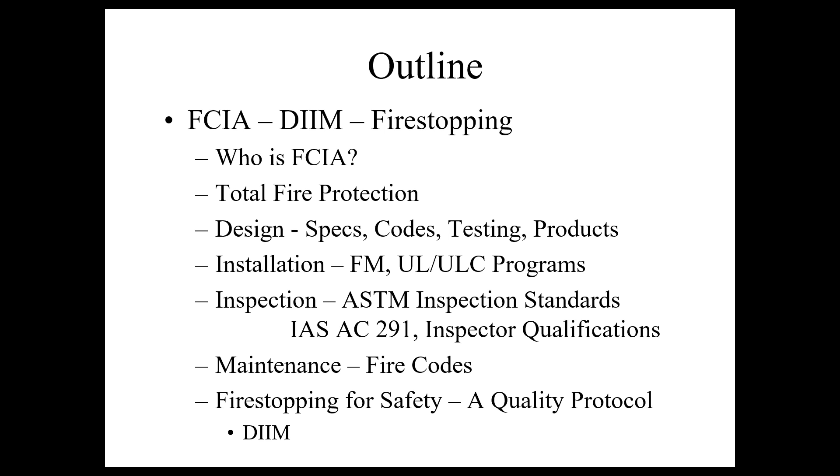So who's the FCIA is what we're going to cover, a little bit about total fire protection, design, specs, codes, testing, installation, inspection, maintenance, and fire stopping for safety. I'm going to vary the presentation just a little bit from time to time and talk about some of the things in the industry as well.

So the FCIA members include contractor company members, manufacturer company members, Firestop consulting agencies, distributors, and manufacturer reps. That's the membership, company membership, and anybody at the company can participate in things at the FCIA. We don't keep things hidden behind a members only section, we keep it wide open for people to see. There are some benefits to members that we do keep in the members only section, but not everything.

We try to keep the website open so that specifiers, building officials, fire marshals, and others can go learn about our industry at a very friendly site. Look for the website to be updated here shortly, launched in the next 30 days or less. What do we do as an association? We advocate for fire and life safety. We've got members that are involved in fire stopping and barrier management services.

This barrier management services trend started about 15 years ago at the FCIA in 2006, 2007. Our first barrier management symposium was at the 2005 Firestop Industry Conference and Trade Show in San Diego. We invited the door industry, the gypsum industry, the door hardware industry, the fire-rated glazing industry, and of course us in fire stopping. We talked about the whole barrier.

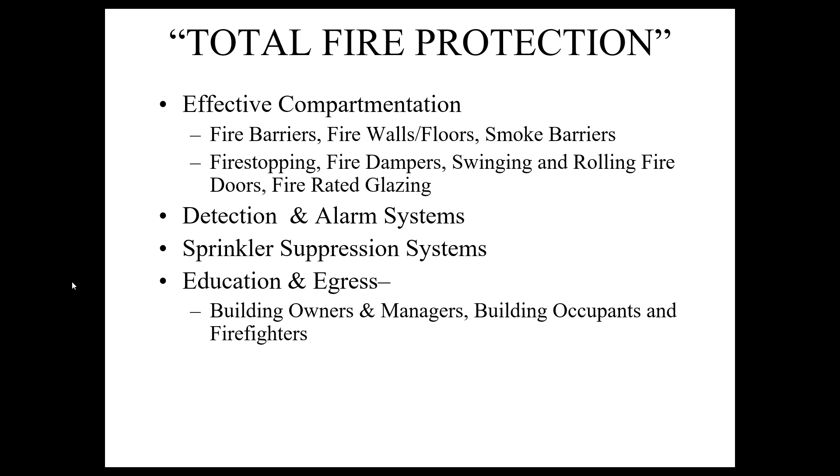Building owners and managers have to design, working with professionals, that egress system, and the building occupants and firefighters need to understand that egress system so they know there are two ways out of a building. We always used to joke with our kids that they ought to know two ways out of that college recreational place and the educational place. Now at age 30, they get it.

So the DIIM: proper design, a specification written by a professional, a single specification, the 078400 section. That's the overall section such that there's one offered.

One specification section. There are several choices in master format. CSI and CSC develop master format together. There are several sections that can be used for specifications, 5 different sections. The question we always ask our architect friends is, do you really want to have 5 different sections to talk about the same concept? Do you want to use that much paper, that much disk space in order to describe one specific operation called fire stopping?

Most of the major specifiers we know through Construction Specifications Canada, Construction Specifications Institute, use that simple 078400 single specification section to put perimeter fire containment, joints, both head of wall, bottom of wall, and then also penetrations, of course.

The tested and listed systems, I'm not going to go through the test standards, but just know there's all kinds of different test standards that determine the suitability for use of the Firestop systems in specific applications.

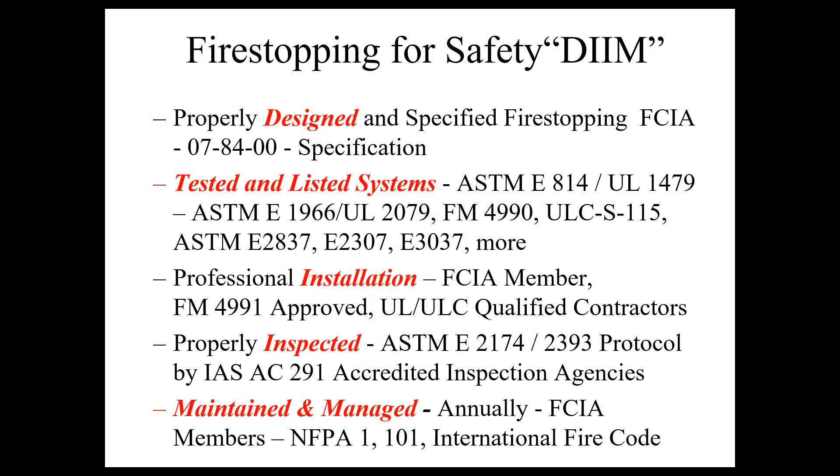Maintained and managed, that's a big thing. We're going to go through that in a little bit and talk about the specifics of maintenance, because existing buildings, we believe, is where there's an opportunity to make sure that the fire resistance is going to work when called upon by fire. Same thing with smoke resistant properties of buildings.

There's a lot of obligation in the fire codes to the building owner on that. We'll go into it later on.

Proper design, the code, the specifications, and the systems, or as they're called in the building code, design listings and manufacturer's installation instructions. So D, design, the building code communicates to the specifier, the architect, design professional, to specify the appropriate standards and the appropriate installation process for fire stopping. That comes through the specs directed by the building code.

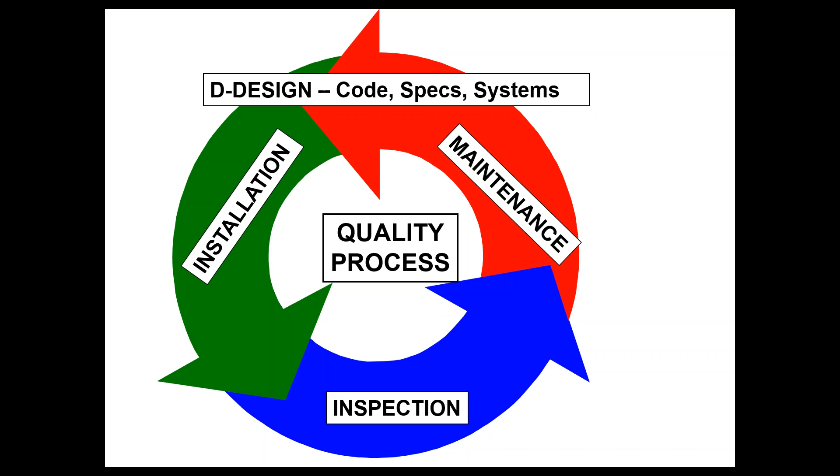The construction documents, of which the specifications are a part of, communicate those requirements to the contractor, general contractor, and then also to what the specification calls the installer. The installer refers to the company, not necessarily the person with the tools. But the D, design, is the first part of the DIIM quality process.

The DIIM quality process, when it comes to the building codes, I'm not going to spend time on this today, but just know that the building codes in Chapter 7 of the International Building Code, Chapter 7 of the Fire Code, Chapter 8 of NFPA 5000/101, you'll find fire resistance. You'll also find it in the National Building Code of Canada and the UAE Fire and Life Safety Code of Practice.

The I for installation is huge. From a Firestop perspective, we need to make sure that the systems are selected properly, the systems are analyzed properly, there's some self-inspection by the contractor, and that the FCIA member FM and UL contractors are used, and the Master Certificate of Compliance might get used as well.

Let's take a second to talk about this Master Certificate of Compliance, the new program from UL and ULC. What the program does is provide a field audit of the management system on a specific project for a small fee. The Firestop contractor that's UL qualified can contract with UL for them to do the audit of their management system for that specific site and then issue a certificate to the Firestop contractor.

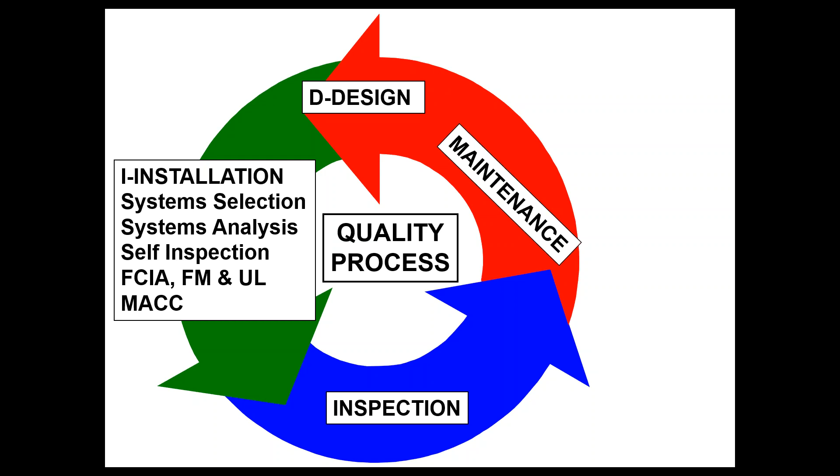The Firestop contractor can then use that as their proof source that the Firestop has been installed to their management system. Companies or organizations like maybe OSHPD might like it for their hospitals. Maybe the State of Illinois Department of Public Health wants it for the hospitals here. Maybe the Civil Defense in Dubai, Abu Dhabi, the United Arab Emirates, and in Qatar wants to use it to prove that the fire stopping was done and the management system of the Firestop contractor was used as well. That certificate is only issued to the Firestop contractor.

What's the first thing we do from the Firestop contractor's perspective? Not me personally, but the Firestop contractor members of the FCIA - what do they do? They spend time on systems analysis and systems selection.

The systems analysis is something that's huge and has to be knowledge that's in the Firestop contractor personnel from top to bottom. Understanding how those systems work, whether you're the worker, the estimator, the superintendent, the foreman of the workforce on the project site. If there's no understanding of the systems and the listings, there's no respect for them.

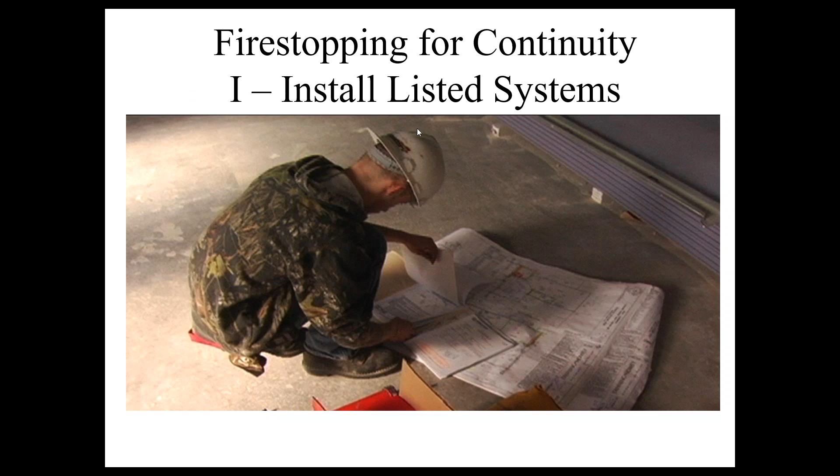The respect for them is that our manufacturer members have invested millions of dollars on listings, tested and listed systems. And if people don't respect them, guess what? We don't know if that Firestop will work because it might have been installed completely incorrectly. Systems, listings, are what the FCIA member FM and UL contractors are all about.

There's a whole bunch of products that have been made by our manufacturer partners. The FCIA has a 4-hour program that analyzes the DIIM of firestopping and includes advantages and disadvantages of all these different types of products, along with the listings analysis that goes on with those products. That 4-hour program, believe it or not, we can extend it to a 1.5 day program. The FCIA announced a program at its Firestop Industry Conference and Trade Show in November 2019 that a 1.5 day education program will start taking place in 2020 with the exams offered at the end of it.

But all these different types of products invented by the manufacturers are all to be installed according to the International Building Code and NFPA's codes, to the manufacturer's installation instructions and the listings. So simply having a product data sheet on a job site isn't going to get the job done. The inspection agency, building owner and manager, general contractor, really only has to ask one key question to know whether or not the Firestop contractor, whoever is installing, the Firestop installation contractor, whoever that is - electrical, plumbing, mechanical, or a company doing the complete Firestop scope of work.

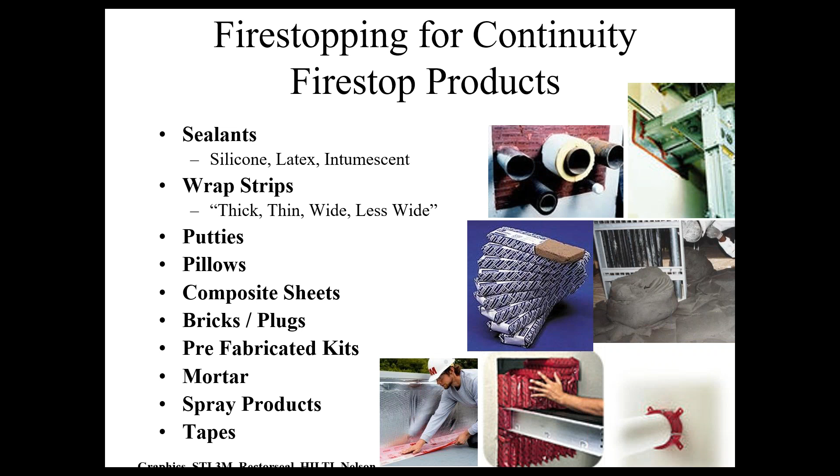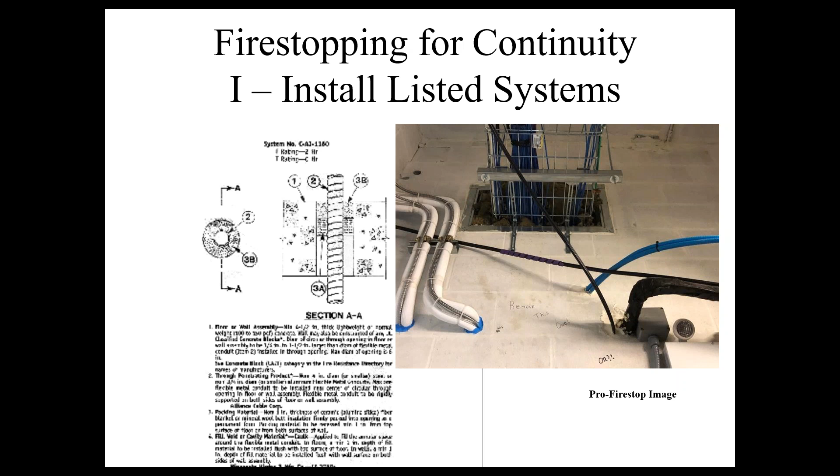So the FCIA's Firestop Manual of Practice covers all of these things as far as its analytical education to contractors, specifiers, manufacturers, reps, and others that use the document.

How do you select a system? How do you analyze it? First things first, understand what the assembly is. And the assembly is a big deal. The assembly can be something in the listing, such as a concrete wall, concrete block wall, wallboard assembly, gypsum wallboard assembly with metal stud backup, or with wood studs, depending on the fire resistance rating for that. We'll go into where to find those in a few seconds.

Then what's the thickness of that assembly? What are the penetrating items, and are there any coverings? Is it a single penetrating item or multiple penetrating items? What's the size, type, and thickness of those penetrating items, and the size, type, and thickness of the pipe coverings? What's the annular space size, the gap, or the breach size? A breach was made in a wall or a floor assembly, and the annular space would be what's left after you put the penetrating item in.

Then, what are the joint or gap sizes? The same exercise that we use to figure out penetrating items is also used for joints, whether they're head of wall, bottom of wall, or perimeter fire containment systems. Once we understand the sizes, then we can figure out the systems and listings, and figure out which backing, fill materials, and other materials are used to create that firestop system.

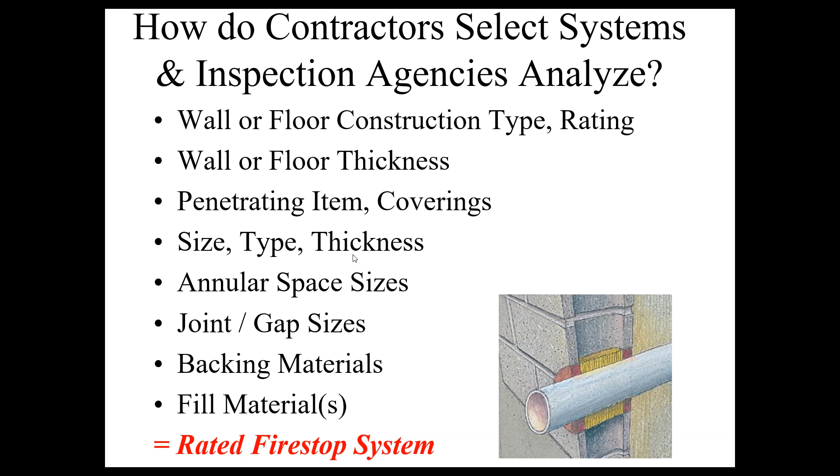How do these systems become systems? Well, they're tested at a laboratory. The system selection and analysis - everyone looks at firestop and says it's easy, just put a bunch of caulk around something and off you go. It's not as easy as it looks. It requires somebody with a brain to understand how that UL directory works, how the FM approval guide works, and how the Intertek directory works, and the UL directory, of course.

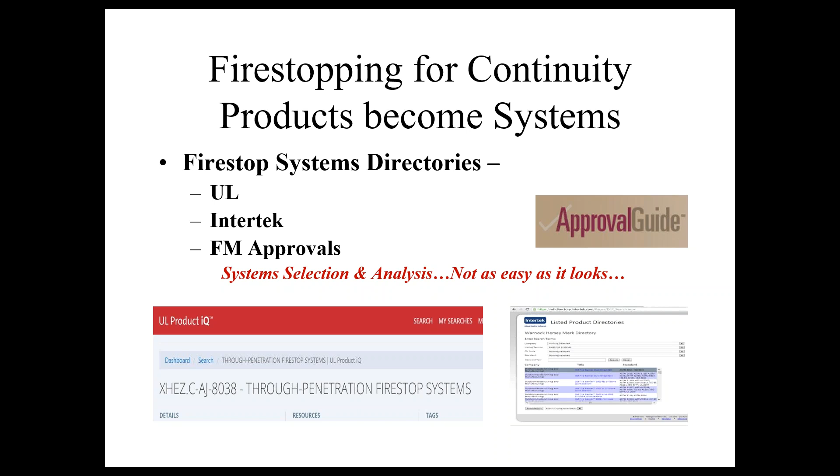As far as selecting systems, our favorite thing to do is hit the UL Product iQ. That's what we do on Friday nights here. You have to sign up for it, put your name, email address, all that kind of thing. There are some paid services for it, but access to the directories is free. And then once you're at the Building Materials and Systems, you just click on that button. Guess what - continuity, head of walls, which is the non-rated roof to the fire resistance rated wall, fire dampers, electrical circuit integrity systems.

Those are the endothermic mat products from two of the manufacturers that have those as well. Exterior wall systems for NFPA 285, a big deal after the Grenfell Tower in England. Fire doors, fire-rated roofs, walls, floors, beams, and columns. In the U400 section, we'd find fire resistance rated gypsum wallboard assemblies. Fire-rated roofs, walls, beams in Canada, grease ducts, ventilation ducts, structural steel in petrochemical facilities - that'd be the UL 1709 time temperature curve, and of course firestop systems, joint systems, perimeter fire containment systems, roof deck constructions. Everything you want to know about fire resistance is right here.

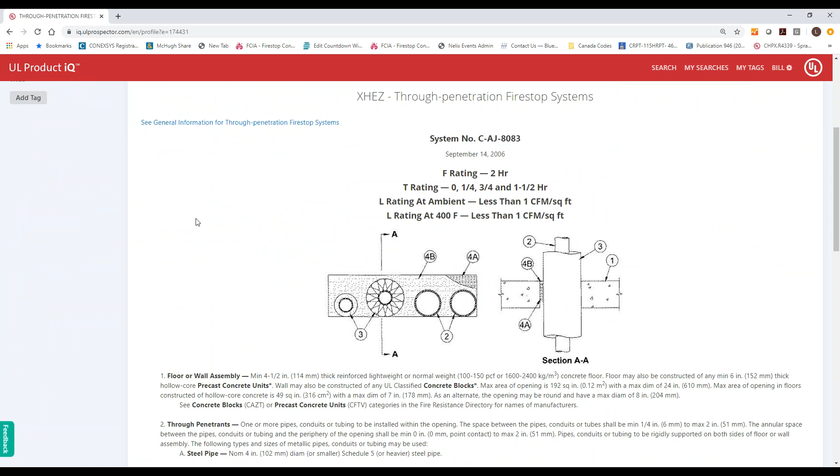So clicking on firestop systems, if we look at a system number, I think I had C-AJ-8083 up on the screen. It's an STI system for a multiple penetrating item.

And I'm not going to spend tons of time on the analysis. All I'm going to say is, first things first, what's the fire resistance rating? What's the T rating, or temperature rating? How long does it take for the penetrating item to heat up 325 degrees above ambient on the non-fire side? On the floor, it'd be above it. On the wall, it'd be on the non-fire side. What's the L rating, air leakage rating, to simulate smoke moving in an assembly or moving in a building through assemblies?

Then we'll figure out what that wall is made out of. This one's either concrete block or precast concrete.

Penetrating items, how many, what type? It says one or more pipes or tubes, and the annular space is specified in the design as well, from 0 to a 2-inch max.

It will also tell us that the space between the pipes shall be a minimum 1/4 and a maximum 2 inches. So if you get in the field and find out that these penetrating items are touching, guess what? We've got the wrong system. We've got to go find another system.

Then it'll talk about the type of pipe covering that's available or able to be used along with the Firestop system. All of this has to be understood before we've got ourselves a Firestop system.

How do people get trained? How do companies get trained? Most of the manufacturers have invested tons of dollars in their personnel in the field, training people to install their products. Think of the millions and millions of people that install penetrating items: electric companies, low voltage electric, mechanical, electrical, plumbing, communications, high voltage, other cabling companies, hydronic piping, plumbing piping. There could be about 20 different construction discipline employees installing Firestops.

It's a multiple million person education program. So some of the manufacturers train people for half-hour, one-hour, two, four, eight, or twelve-hour programs.

But there are other programs available where a specialist Firestop contractor, we hope an FCIA member in good standing, gets themselves FM 4991 approved, UL qualified. There are third-party management system programs where an individual has to pass an exam from UL or FM. The knowledge comes from the FCIA Firestop Manual of Practice, from the listings.

All the different manufacturers' products are covered in a generic fashion, meaning you don't need a card from 10 different manufacturers, although we do, as an FCIA, recommend that the manufacturer also provide education to the workers and education of the company. The company gets approved or qualified, and the individual winds up becoming a designated responsible individual inside the company that manages the program.

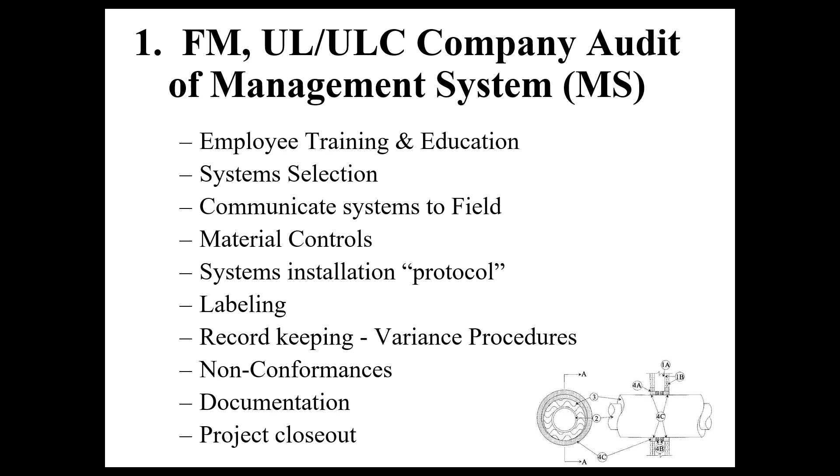So there's as-built documentation passed on to the general contractor, so it becomes the building owner and manager's inventory of fire resistance, and of course closing out the project.

There's some benefits to the FM or UL program, to the building owner manager, to the specifier. We know that the Firestop system process has been done properly because the management system has been audited by a third-party independent entity. The manufacturer is not the third-party independent entity. Why? Because there's an economic relationship between the manufacturer who wants to sell products and the contractor who wants to buy and install. The FM and UL companies don't really have a vested economic interest in the Firestop contractors.

The program verifies that the management system works. It verifies the communication from the office to the field and back, and really instills a measure of quality to the company. The company does appoint a DRI, designated responsible individual.

That person does pass the exam in order to become a DRI. Plus, they have to keep CEUs. They're retested every 3 years if they don't keep enough CEUs, and there's one DRI for every contractor location.

For continued satisfactory performance, there's documented archive record keeping that's mandated by the program, and employee training that's audited. Does it work? Is it done? How's it tracked by the company? There's a job site visit by FM or UL, not an inspection, and then a DRI that verifies that things are moving along nicely. I talked about the Master Certificate of Compliance.

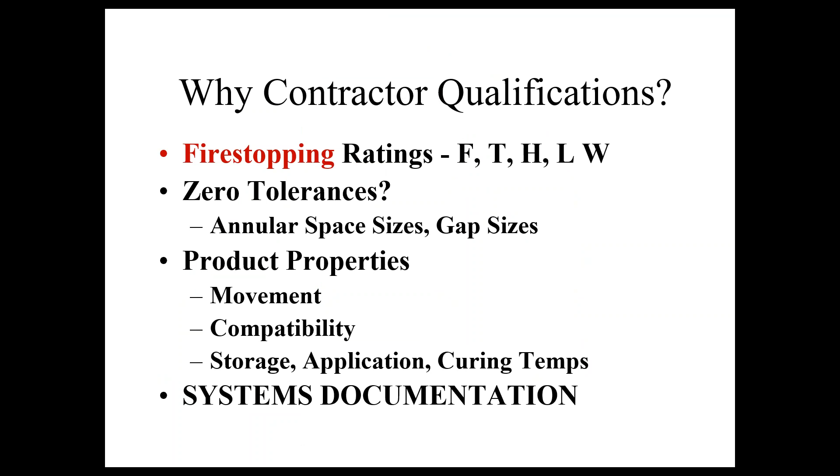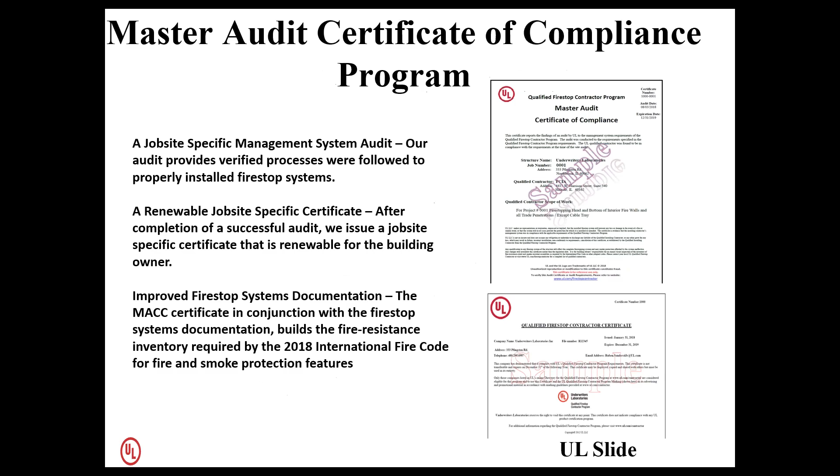Inspection is the second I in the program. Let's back up a second. On the FM and UL programs, the FCIA worked with FM Approvals and UL to build these two programs. Why? Because we wanted to have the installed listings and manufacturer's installation instructions, the installed systems, so that they work at the end of the day. We then wanted to make sure, with inspection, that there was a quality check on all the contractors, including the FCIA member, FM approved, UL qualified contractors.

We're very pleased that these two standards were added to the International Building Code in the 2009 cycle, for the 2012 International Building Code. The FCIA was the code proponent to put those in. It took us almost 10 years to get it into the building code. The standard 2174 was developed in 2001, published, and it took us until 2012 to get it in.

Where did they come from in the first place? The FCIA had a conference in San Antonio in 2000.

During the conference, several FCIA members asked a question of Mike Pfeiffer, then with the International Code Council, now the ICC's Senior Vice President of Codes: 'Hey Mike, how come there's no special inspection for firestopping like there is for fireproofing?' He said, 'Do you have a standard, and did you put it in the code? This is your code. Go develop a standard, then do a code proposal, and get it into the code.'

So that's where the ASTM E2174 and E2393 standards originated. We then worked with our manufacturer partners at ASTM to build them. We then went to International Accreditation Services in 2008 to build a quality program for inspection agency companies that included an inspector qualification. As part of the inspector qualifications for IAS AC291, the inspection agency can hire people who have passed the FM exam, the UL Firestop exam, or the International Firestop Council Firestop exam.

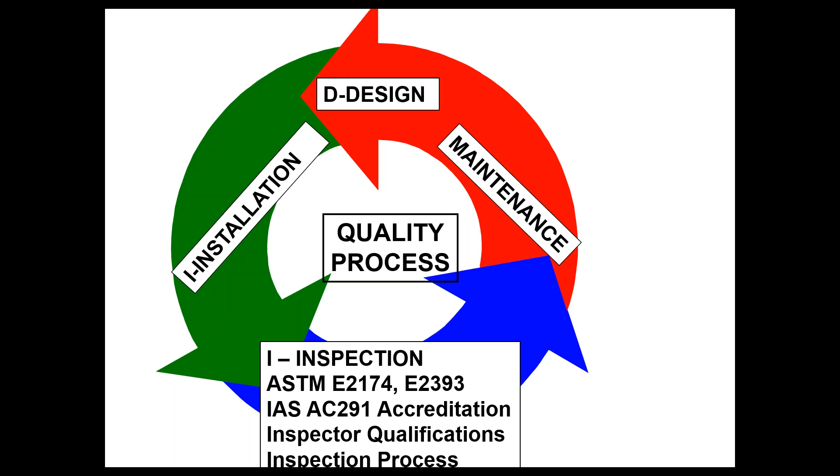We believe that either the FM or UL Firestop exam and the International Firestop Council exam are needed, because the IFC exam focuses heavily on inspection, while FCIA's work with FM and UL has both exams focused on inspection as well as installation.

How does this work? Why is inspection needed? It's needed because of the way the market is currently organized. Currently it's a bit of a free-for-all as to the installation of firestop products. 'He or she who pokes the hole fills it' happens all too often on projects, probably 40% of the time, maybe up to 50% depending on who you talk to.

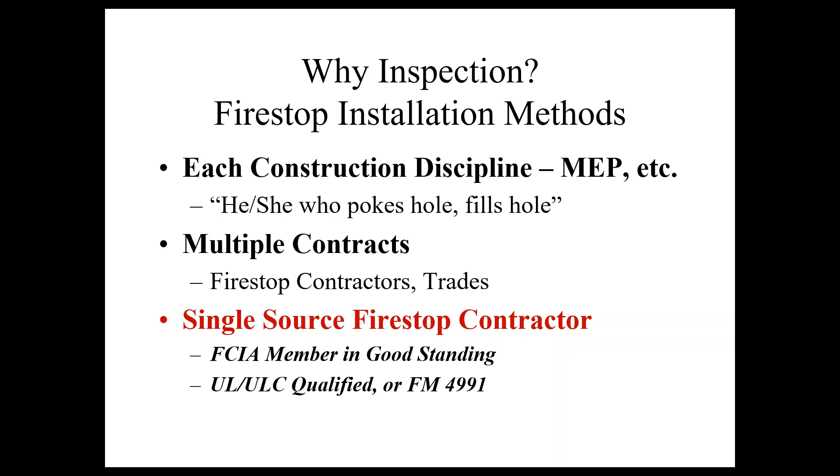The second method is the firestop contractor installs, and then several of the construction industry disciplines do. The third way is a single-source firestop contractor that's an FCIA member in good standing and UL qualified or FM 4991 approved.

Here's what happens when you're not FM, UL, or FCIA members. These are pictures taken by some friends up in Canada, Affinity Firestop Consultants, good friends up there. But take a look at what's here. It's just packing tape. A restricting collar.

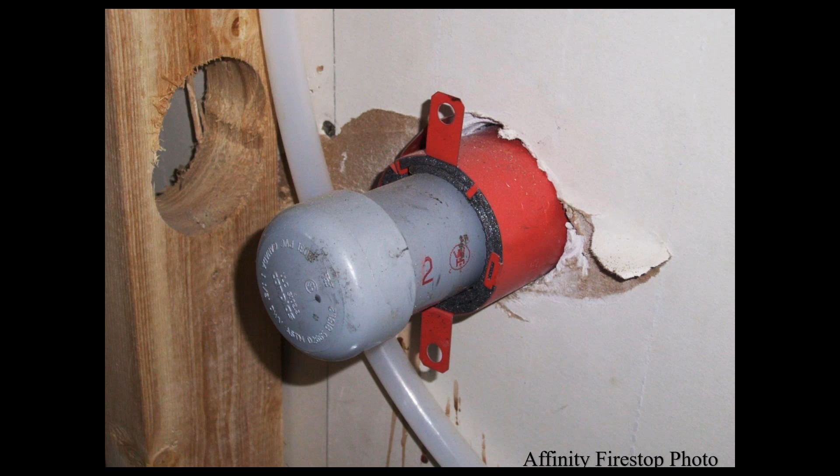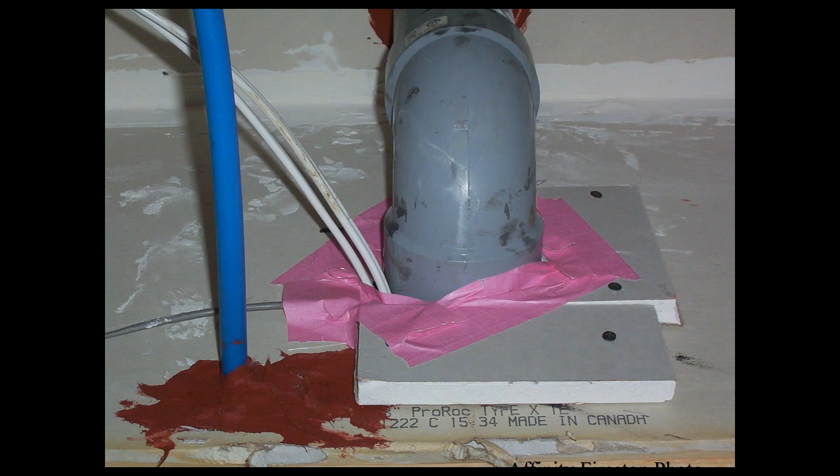A pipe device, obviously, call it a plastic pipe device, call it whatever you want to call it. It's not even installed properly. It's installed upside down, the annular space isn't right, it's not anchored. What a mess. More tape. There's no such thing as a scab patch, as they call them, where gypsum wallboard is simply screwed to another piece of gypsum wallboard and then a bunch of tape put around a plastic pipe.

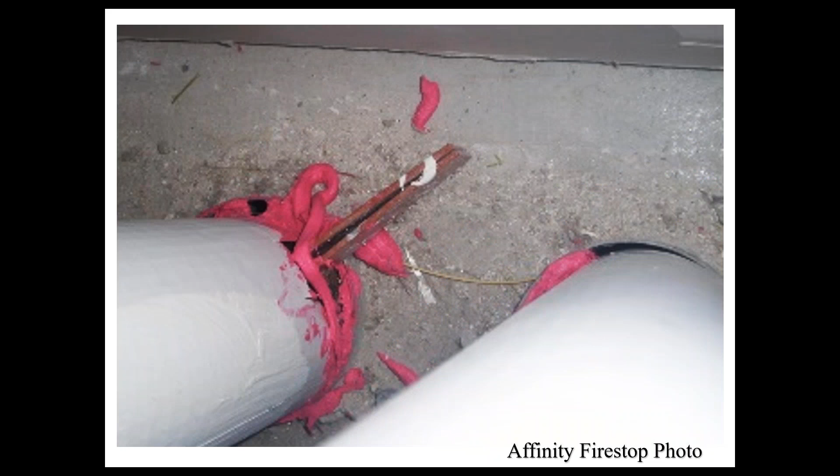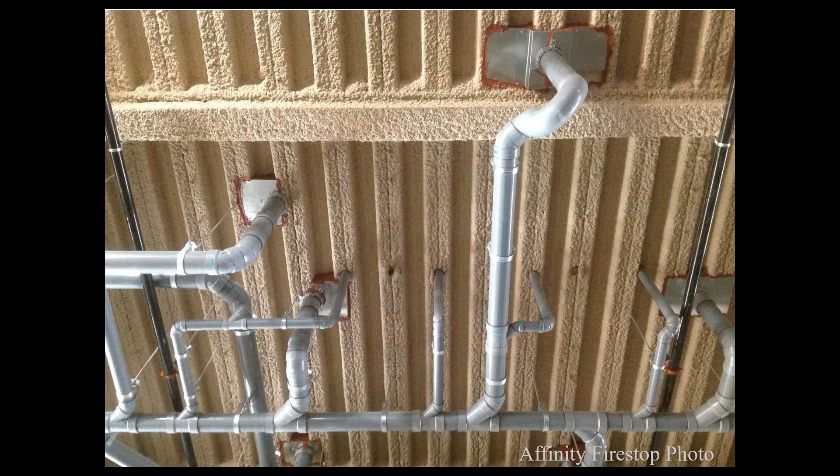Take a look at this one. Certainly this is a very laborious way to install firestops. There are other methods using some of the fire cans that might be more competitive, but just know that there's a lot of detail that goes into installing firestop systems.

Take a look at the composite sheet and how it's anchored. Note the firestop sealant that's taking care of the flutes in the metal deck. The listing would say it would be okay to install firestop systems on top of that SFRM fireproofing as well.

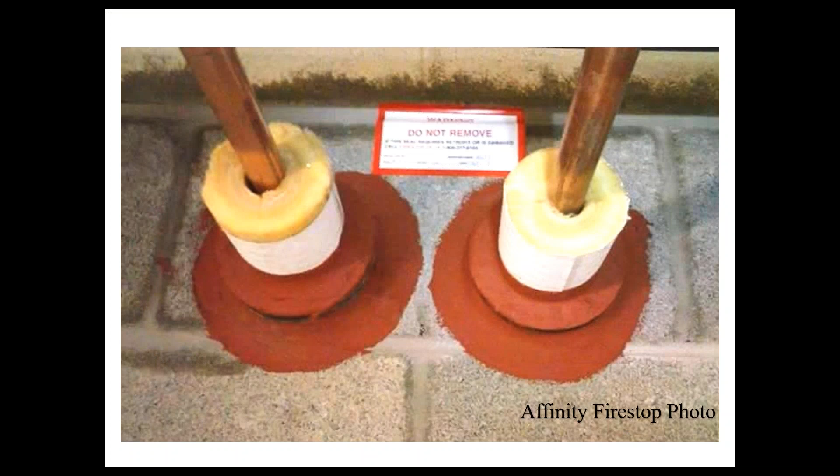Whether it's insulated penetrating items or what, the inspection process is to make sure that the firestop contractor did it successfully. When measuring sealants, for instance, the International Firestop Council has said that when measuring sealant thicknesses in destructive testing, shrinkage has to be taken into account. In the ASTM standards, we were able to get a reference to this in the 2018 version of ASTM E2174.

I have a proposal in for E2393 to make sure that sealant thicknesses are measured appropriately at the right place. The measuring tape on the right-hand side shows the measurement at the wrong place. So does the measurement of the measuring tape in the lower left-hand side. The measuring tape should be measuring the thickness of firestop sealant at the far right side of that little sample on the bottom left. It needs to measure the thickness of sealant at the bond lines where it touches the penetrating item and touches the assembly itself.

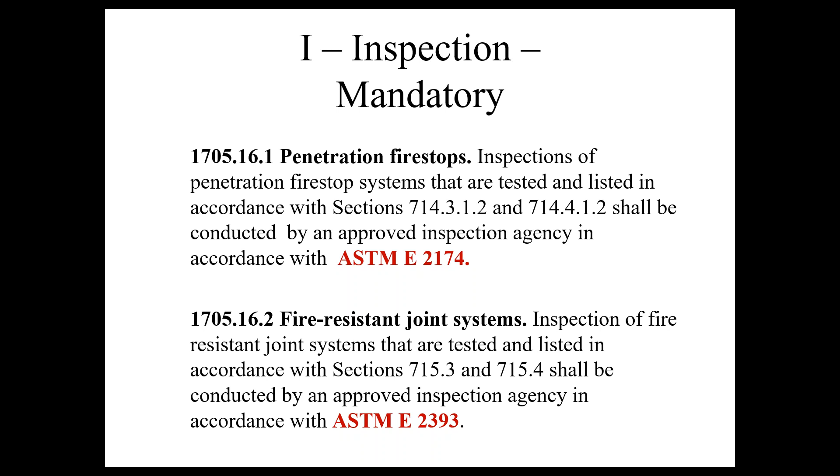Firestop systems inspection is mandatory based on Chapter 17 of the International Building Code, where it specifies E2174 and E2393. There are some qualifications for the inspector firm and the inspectors in both ASTM E2174 and E2393. Both call for independence of the firestop inspector and the inspection firm. The inspection firm is supposed to be divested from the installing company, the distributor, manufacturer, competitor, or supplier, and not a competitor. Go figure.

What do you think the inspection would be like if they're a competitor of the firm that's there? And then again, individuals for IAS AC291 need to pass exams. This is not a mandatory code item; it's something that's in specifications, and something we hope comes more into specifications. The reason is we believe that companies that have invested in IAS AC291 have gone the extra mile to prove their competency as an organization.

They have a quality process in place, along with individual competencies, people inspecting who have all passed the exams. In ASTM 2174 and 2393, there's a pre-construction meeting, there's observation or destructive testing, and there's a report. A key thing the inspection agency cannot do is supervise.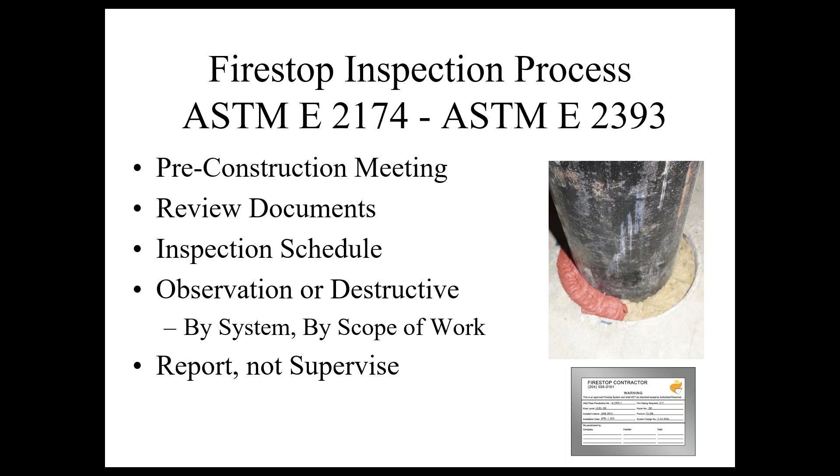What's supervision? Supervision is when the inspection agency starts choosing the listings and the systems for the firestop contractor. In our opinion, that's supervision and out of the scope of the firestop inspection agency.

Let's talk about maintenance. The fire codes mandate that fire stopping and fire resistance be completely managed and maintained. This is something we think gets missed in buildings. How do we know? All I have to do is walk downstairs in my building and open the door to the parking garage, look up at the penetrating items that caused a breach in the fire-resistance rated wall assembly, and see maybe a skim coat of mortar or some mineral wool hanging out the side, to know that the continuity might not be there.

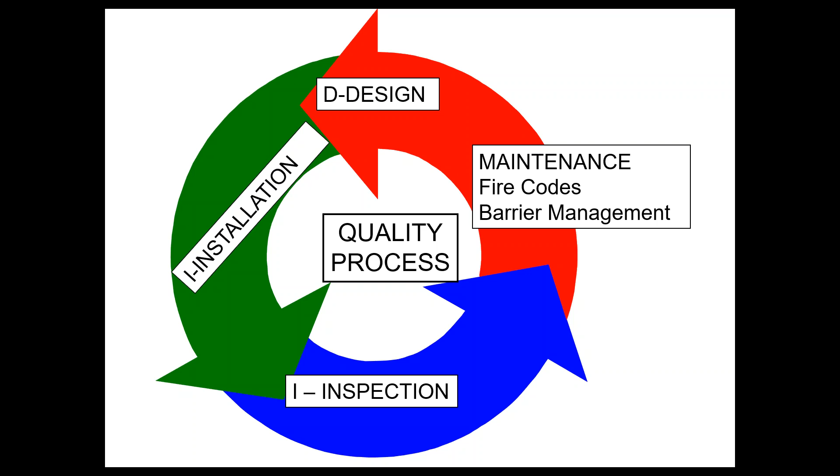Maintenance is required. Barrier management helps the building owner and manager comply with the fire codes. NFPA 1, NFPA 101, and the International Fire Code all have minimum requirements for the frequency of maintaining that structure.

Take a look at NFPA 1, the National Fire Code. It has a section in Chapter 12, 12.3.2, that outlines quality assurance for penetrations and joints. Where did that come from? FCIA's Bill Koffel worked at NFPA and with our code committee to come up with this language. It says that in new buildings, new construction 3 stories or greater in height, a quality assurance program for the installation of devices and systems installed to protect penetrations and joints shall be prepared and monitored by the registered design professional.

What's the quality assurance program? I just laid it out. It's the ASTM E2174, E2393 inspection, and the FM 4991 or UL qualified FCIA member contractor. That's a quality assurance program for those devices and systems.

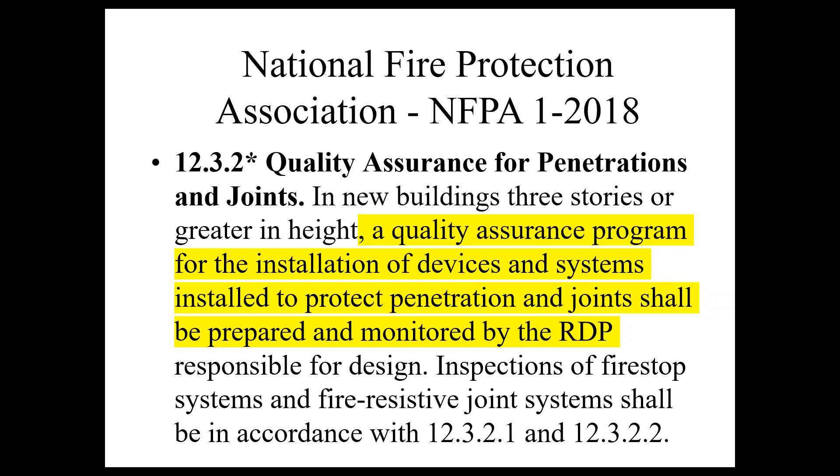In 12.3.3, for maintaining existing buildings, it talks about fire resistance rated assemblies, fire barriers, walls, exterior walls, fire resistive requirements based on type of construction, and even roof covering, shall be maintained, properly repaired, restored, or replaced where damaged, altered, breached, penetrated, removed, or improperly installed. The 'improperly installed' part is huge.

Why? Because for the building owner and manager, 'improperly installed' means that although the jurisdictional inspector might have walked through the building - and that's a different inspector than the inspection agency inspector - the jurisdictional inspector that issues the certificate of occupancy is not considered the quality control agent for the general contractor. That's the general contractor's job, and the building owner and manager's job to hire the right general contractor to make sure the GC hires the right subcontractors to get the building built properly.

This 'improperly installed' language puts the onus on the building owner and manager to make sure that whatever was delivered to them is actually correct. That's why you might see more commissioning of buildings, including the fire resistance rated assemblies.

12.3.3.2 says wherever required, gypsum wallboard shall be repaired, replaced, or returned to the required level of fire resistance using a listed repair system or materials and methods equivalent to the original construction. Original construction means there's a certain spacing of studs and fastening pattern for the complete gypsum wallboard. That means remove the complete panel - 4 feet by 8 feet - and put a new one on.

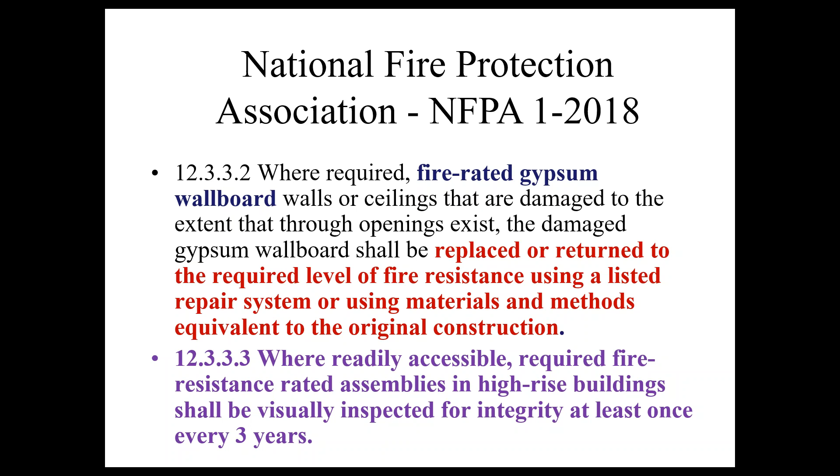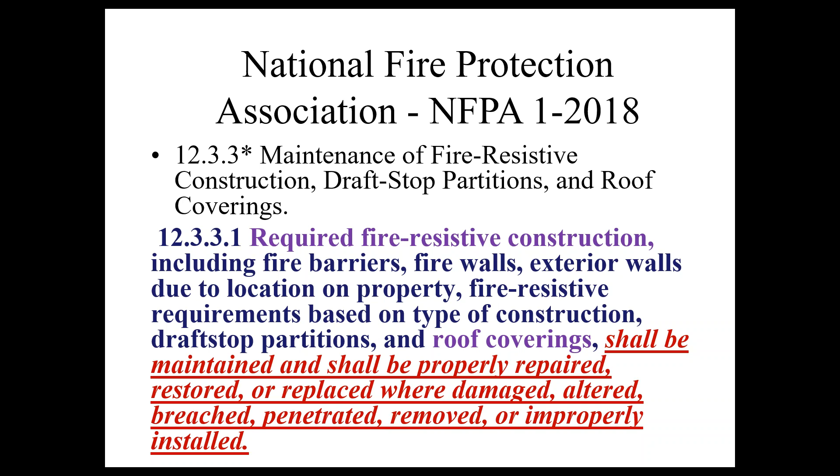Then it says where readily accessible, inspect high-rise buildings every 3 years for integrity. But in 12.3.3.2, it's saying maintain the fire resistance regardless of building height. And in 12.3.3.1, NFPA 1 says in all buildings, maintain and keep the fire resistance rating of the assemblies wherever it's been breached by whatever.

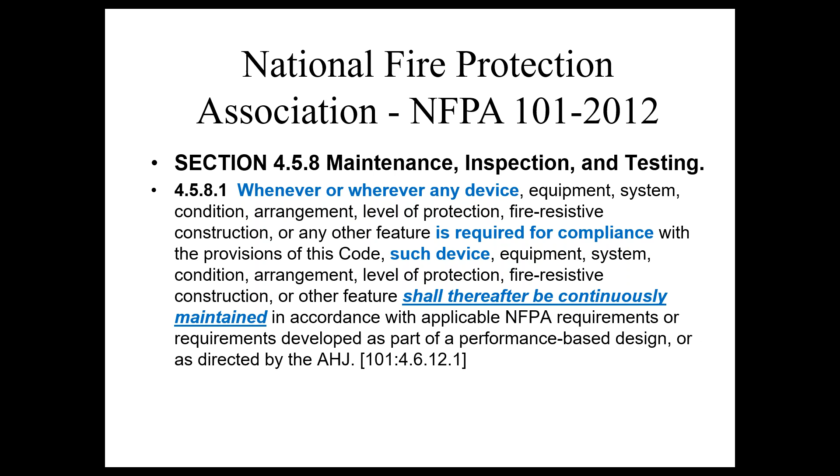Then take a look at the language in NFPA 101. It talks about continuous maintenance of the applicable fire resistance requirements. So two NFPA documents, both wanting continuous fire resistance maintained continuously.

Onto the International Fire Code 2015 - it says the same thing. Look at the language that's in bold. That's not bolded in the actual code, it's bolded here for emphasis. But this same language is also found in NFPA 1.

So present this to your building owner clients and let them know that they might have a risk in their buildings where, if the fire resistance is not maintained, there's liability possibly to them if there's loss of life or loss of property. How's it found?

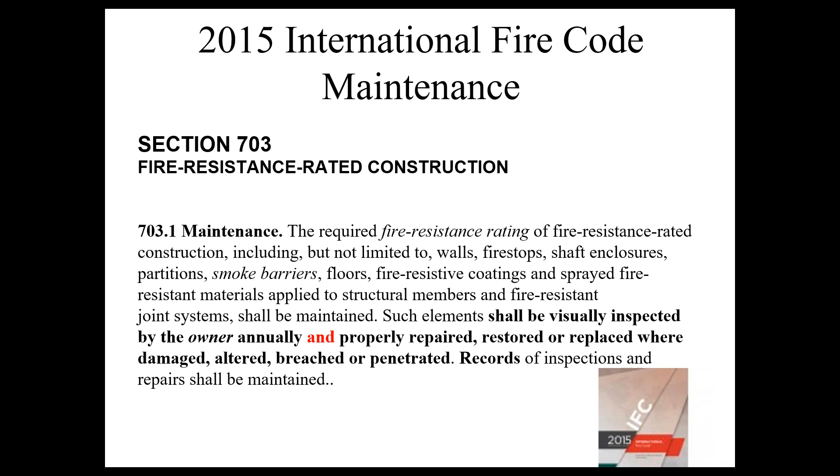The forensic sciences are quite good, and they can know whether or not the fire stop was installed properly, if at all. In the 2018 International Fire Code, there's a new requirement for the owner to maintain an inventory of all their fire resistance rated and smoke resistant construction, which would be fire resistance rated walls and floors, fire dampers, rolling and swinging fire doors and their frames, fire rated glazing and their frames, as well as the fire stopping, every bit of it. Take a look at the language that's in italics.

Inspected by the owner annually. Does that mean that the building owner has to do it themselves? Nope, they can hire whoever they want to do that. Somebody that's a UL qualified contractor, an FM 4991, an FCIA member contractor. Any of those organizations and their employees working for those organizations can be hired by the building owner to survey the building.

And then they have to, again, properly repair, restore, replace where damaged, altered, breached, or penetrated.

National Fire Code of Canada is a different code. It's a performance-based code, and rather than talk about fire resistive construction, it talks about fire separations in the fire separation section. Fire separations are what the Canadians call fire barriers. A fire separation might or might not have a fire resistance rating, but it's supposed to maintain or resist the passage of smoke, whether it's rated or not.

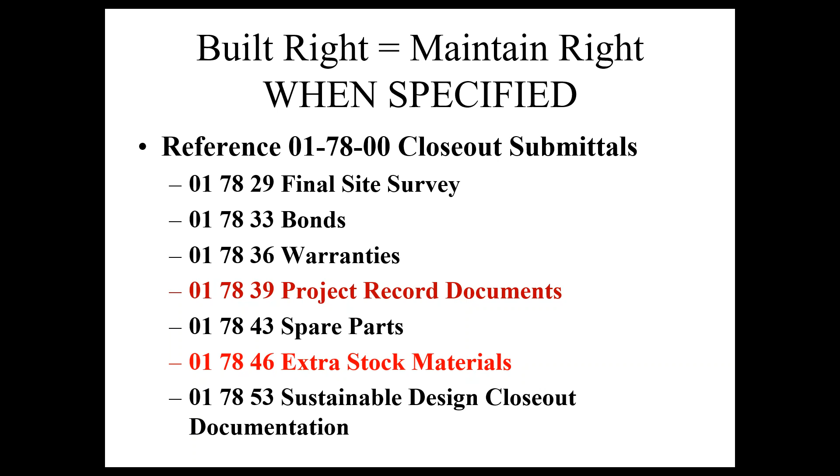Manufacturer's instructions, listings, life safety drawings. Life safety drawings are going to have the fire resistance rated walls and horizontal assemblies. So it's a single package. And then each of the individual fire resistance packages has to have the same thing. In the fire dampers, for instance, the installation instructions incorporate the listings, so no separate listing is required there.

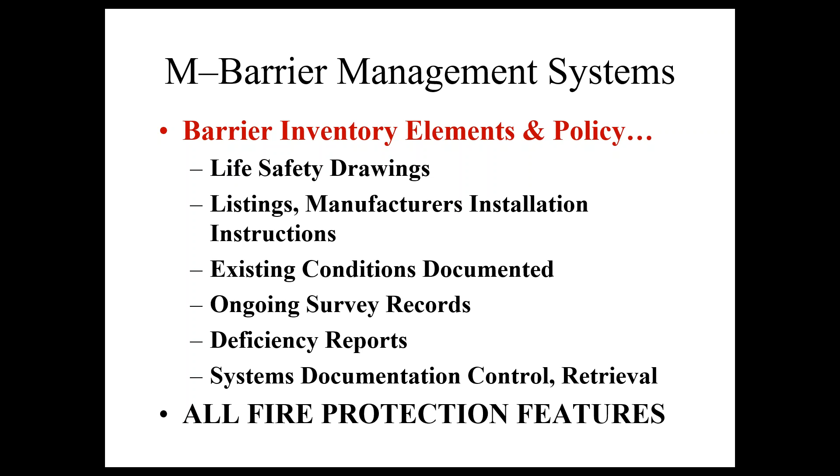When it comes to barrier management inventory elements, I've been talking about the various pieces that are required to be kept by the fire code. This is all stuff that can be kept electronically. Many of the FCIA member Firestop contractors are also barrier management services contractors. Some of them have developed custom barrier management programs that will track the barrier maintenance and make sure that there's an ability to control the documentation and retrieve it when the fire marshal wants it.

Key things for our Firestop contractor members, for our manufacturers and architects who are on the call: make sure you advise your clients that they ought to create a budget to meet code requirements for fire resistance. Ask the building owner if they've got a budget for sprinkler systems - they'll say yes. Ask them if they've got a budget for alarm system maintenance - they'll say yes. Ask them if they have a fire resistance budget, and they'll say, what? That's exactly what you want to say back to them is, no, I meant fire resistance, not what.

We meant the inventory that's required by the 2018 and 2021 International Fire Code is something that you should consider, Mr. Building Owner, Ms. Building Owner and Manager. Consider building that inventory and maintaining it just like you do all the other safety systems in the building.

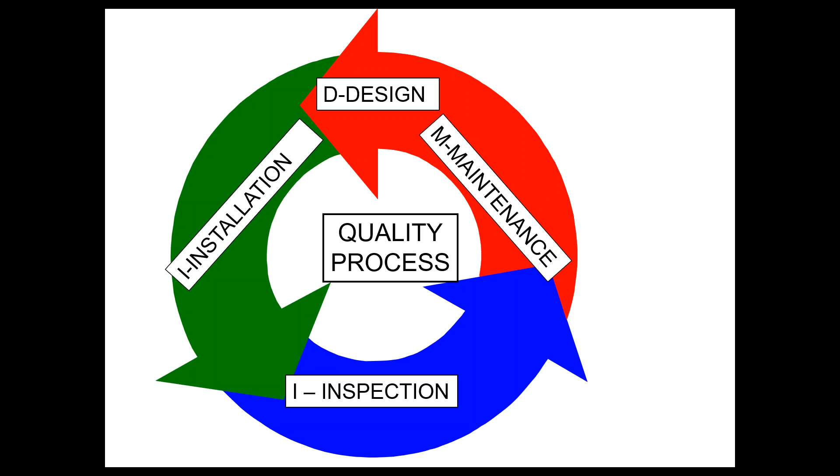So in an hour, I've covered the proper design, installation, inspection, and maintenance of fire stopping. I've got it all in a circle because each of these pieces is the quality process. A professional specifier, installation by companies that understand the installation process for fire stopping, inspected by those that understand the philosophy of systems and listings also, and then also maintenance to the International Fire Code. Know that effective compartmentation is a system, and know that it all has to work together in order to provide the appropriate fire resistance. A couple other key things.

There's been a lot of talk in the industry recently about cross-laminated timber, the tall wood buildings that you might have seen in the magazines are starting to become a reality. The FCIA was ahead of this in 2015 by taking a tour of the National Research Council of Canada's Almonte laboratory, where a lot of the fire testing took place for these assemblies.

We then had the National Research Council of Canada speak on the topic in 2017, 18, and look for more conversations about it in 2019 and 20. We know that the manufacturers are starting to test for this cross-laminated timber, and I'm sure now that it's in the International Building Code that a tall wood building can take place, it's also in the National Building Code of Canada, there'll be listings that show up. Our manufacturer partners probably were not going to invest in cross-laminated timber until it was allowed to be built by the building code. Not really a return on their investment if that building type is not allowed.

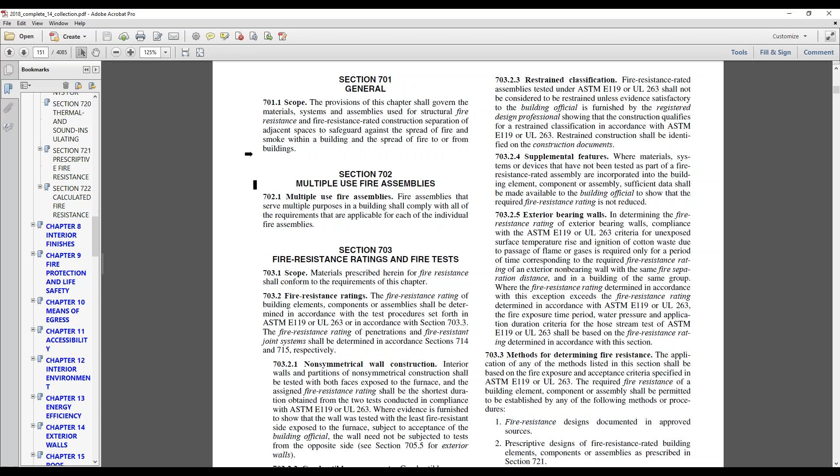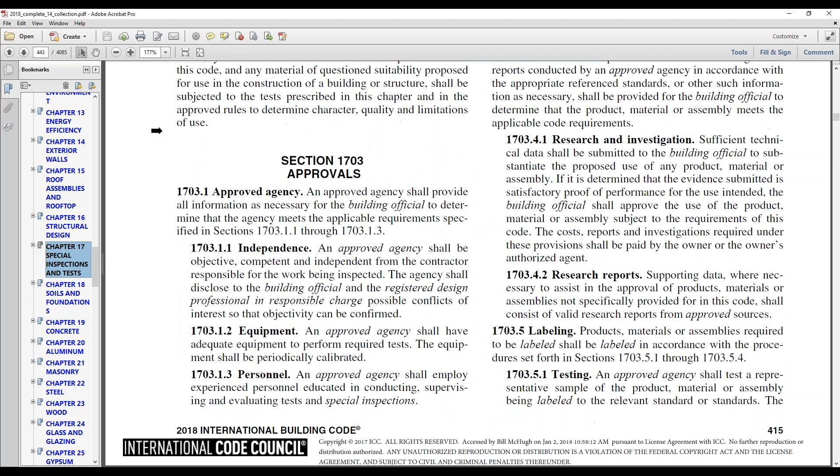In Chapter 17 of the International Building Code, there are two different approvals of the inspector required. One is that the company the inspector works for, the agency, has to be approved. The agency, under 1703.1.1, has to be independent, objective, and competent from the contractor responsible for the work being inspected. Then the agency has to disclose any conflicts. That lays out the independence clause very clearly.

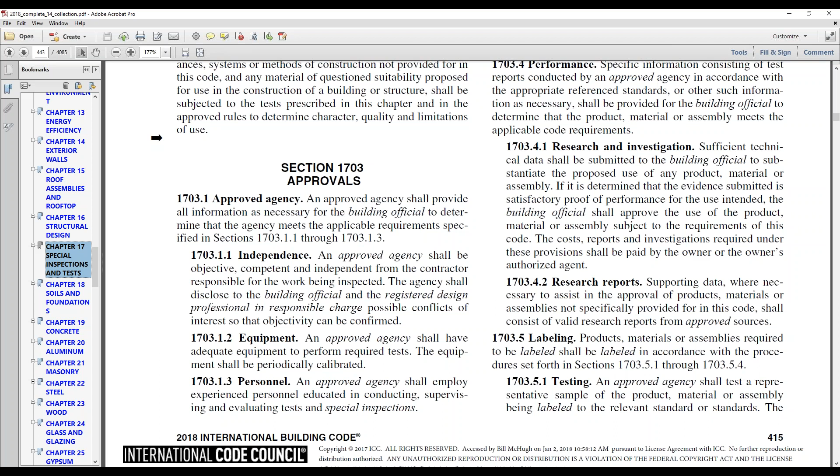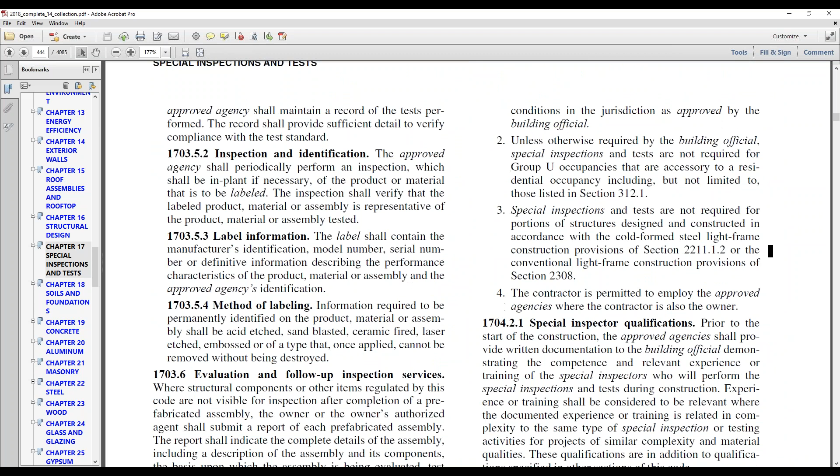Secondly, the approved agency has to have equipment to perform the required tests. Third, they have to have experienced personnel educated in conducting, supervising, and evaluating tests and special inspections. This is right out of the 2018 International Building Code, Chapter 17. Moving up, the building official has to approve that as well, and on the next page there are also special inspector qualifications required.

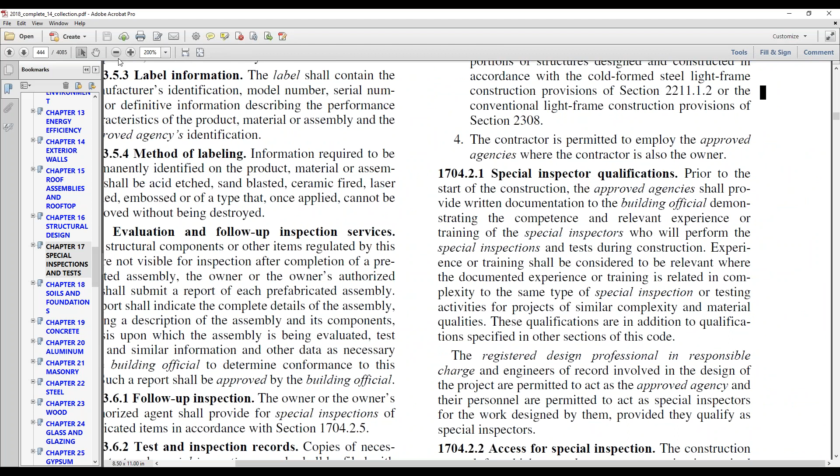I'm going to blow this up and make it look bigger so everyone can see it. Take a look at the special inspector qualifications. It says the special inspector has to have experience or training considered relevant, where the documented experience or training is related in complexity to the same type of special inspection for projects of similar complexity.

So the International Building Code doesn't require a certification. It requires competency and relevant experience, as you see here in sentence number 4, competency and relevant experience or training of the special inspectors who will perform the work.

And the training's got to be relevant to firestop systems. They've got to have documented experience or training in the same complexity, same type of special inspection. So if it's a hospital, which is really quite complex, they should have some hospital experience or something similar in complexity to it.

The competency is proven through taking the FM or UL Firestop exam, or the International Firestop Council IFC exam. Those exams prove competency in firestopping.

The FM and UL Firestop exam have 2 sections. One is about the philosophy of firestopping, that it's a listing and a system support. The second piece actually tests whether the person can select and analyze firestop systems.

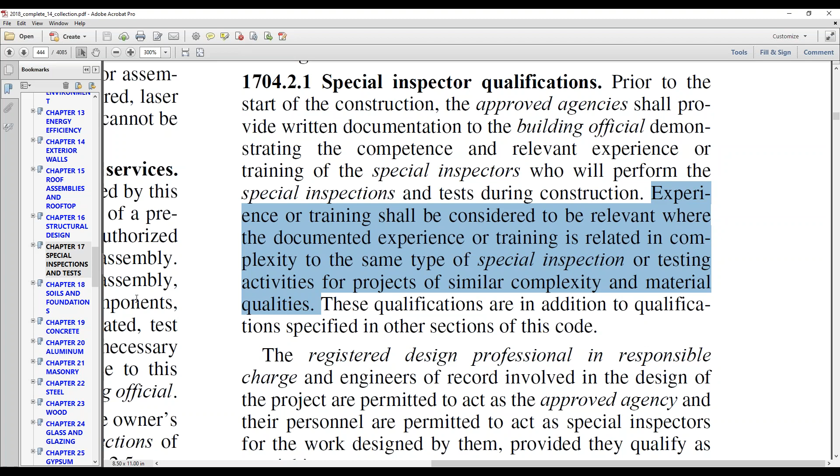That's why there's so much in this special inspector qualification section, 1704.2.1, in the International Building Code for Special Inspection Agencies. Great question, thank you so much for asking that.

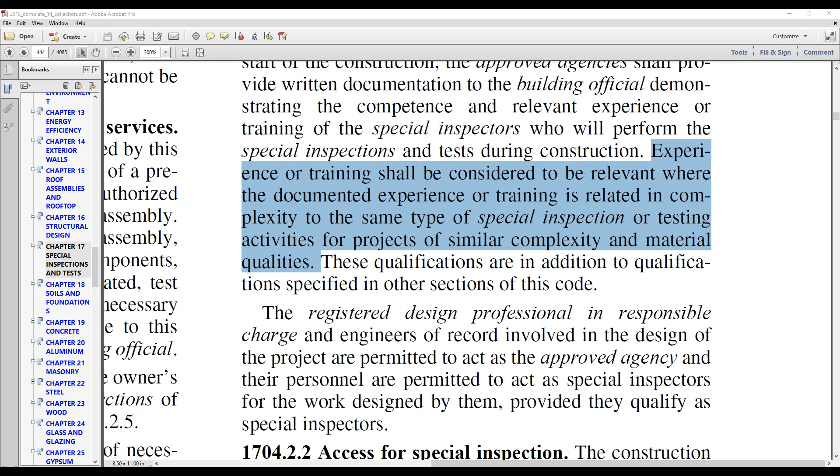Other things about inspection: in the ASTM E2174 and E2393 standards, there is a section on firestop inspector qualifications. That's in section 6 of ASTM E2174 and E2393, and it talks about the inspector meeting the criteria in practice E699 and then having a minimum of 2 years experience in construction field inspections.

There is also an ASTM E3037, or 3038, which is the inspector qualification system at ASTM. Currently, that standard has a flaw in it because it confuses the inspector and the company. It doesn't direct the individual to take an exam—it says the company takes an exam, one person maybe, on and on. It's not currently ready for prime time in our opinion. It exists, it's out there, and it's something an AHJ can use to qualify that inspection agency inspector.